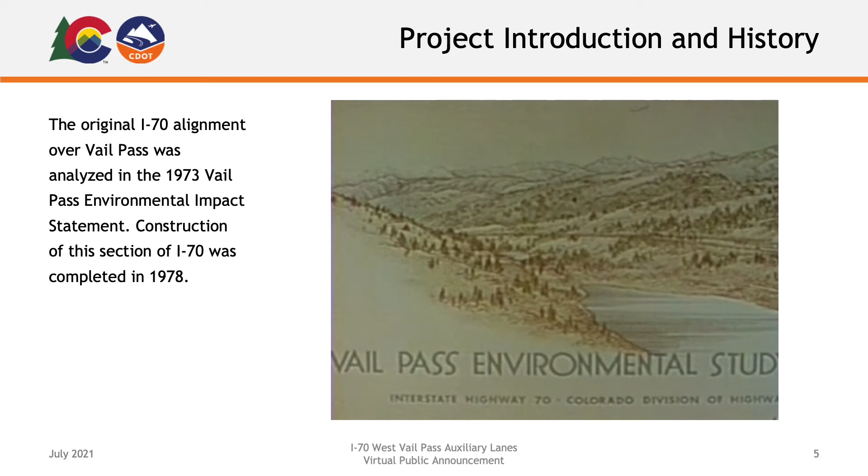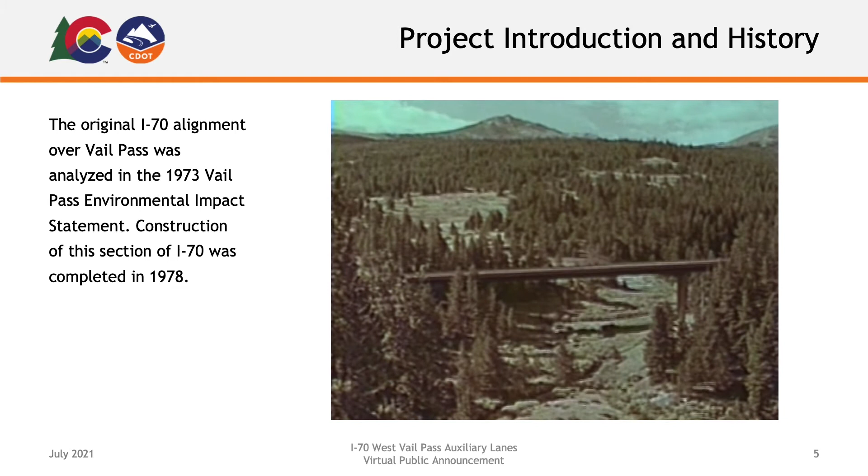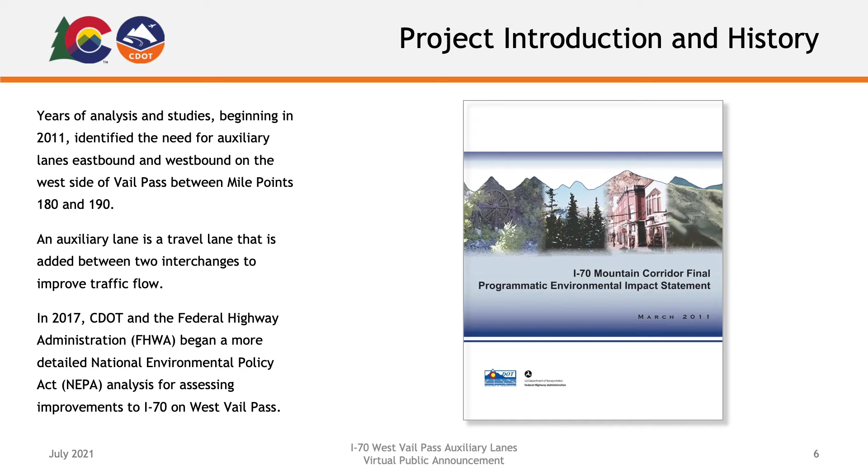The original I-70 alignment over Vail Pass was analyzed in the 1973 Vail Pass Environmental Impact Statement. Construction of this section of I-70 was completed in 1978. Years of analysis and studies, beginning in 2011, identified the need for auxiliary lanes eastbound and westbound on the west side of Vail Pass, between milepoints 180 and 190. An auxiliary lane is a travel lane that is added between two interchanges to improve traffic flow.

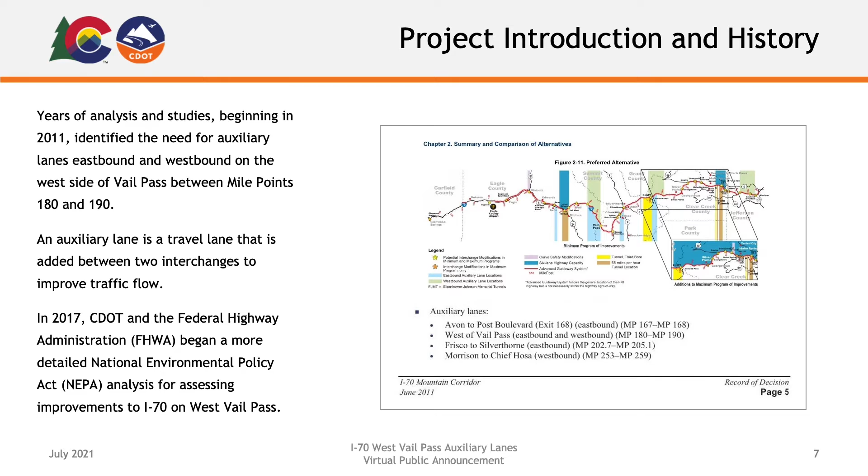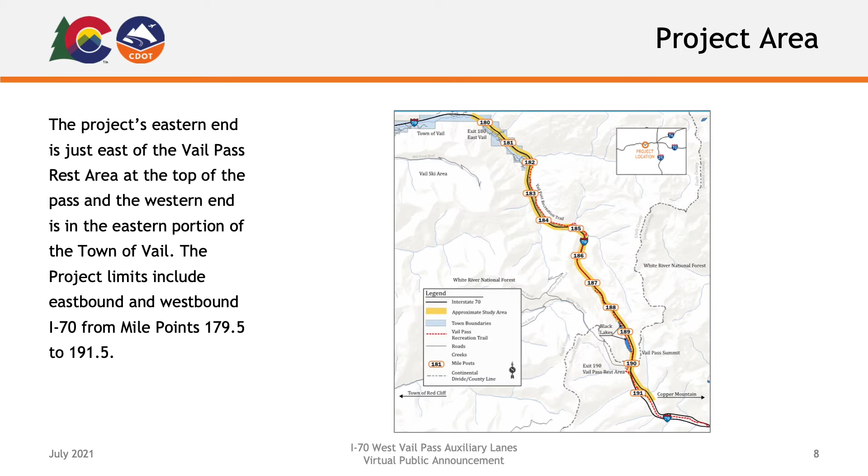In 2017, CDOT and the Federal Highway Administration, FHWA, began a more detailed National Environmental Policy Act, NEPA, analysis for assessing improvements to I-70 on West Vail Pass. The project's eastern end is just east of the Vail Pass rest area at the top of the pass, and the western end is in the eastern portion of the town of Vail. The project limits include eastbound and westbound I-70 from milepoints 179.5 to 191.5.

The project context statement and core values helped us to frame the unique conditions of the project, as well as the concerns and values to be considered during the environmental assessment, EA, and future decision-making. This context statement was based on the original Mountain Corridor context statement and was further developed for this project through a robust process with project group members, resource agencies, and community members. The context statement captures in words the special qualities and attributes that uniquely define Vail Pass.

The project purpose and need statement was developed based on the I-70 final PEIS purpose and need, which identified safety and mobility issues on West Vail Pass related to speed differences between different types of vehicles, such as cars and freight operators or other slower moving vehicles. The purpose of the project is to improve safety and operations on eastbound and westbound I-70 at West Vail Pass. Operations, as defined here, means how well traffic flows through an area, which can be affected by the number of cars and trucks, weather, curves, steepness of the road, and other features.

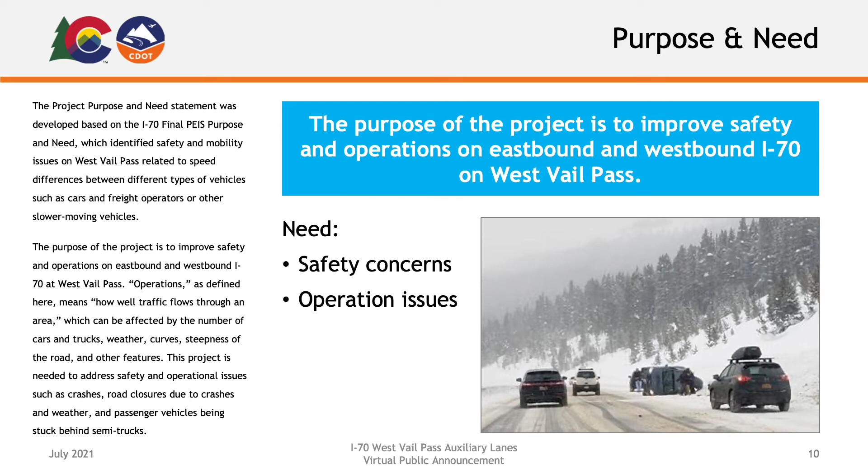This project is needed to address safety and operational issues such as crashes, road closures due to crashes and weather, and passenger vehicles being stuck behind semi-trucks. In June 2020, CDOT was awarded a federal Infrastructure for Rebuilding America, INFRA, grant. This, combined with other funding sources, will allow for construction of the first phase of the project, totaling $140.4 million.

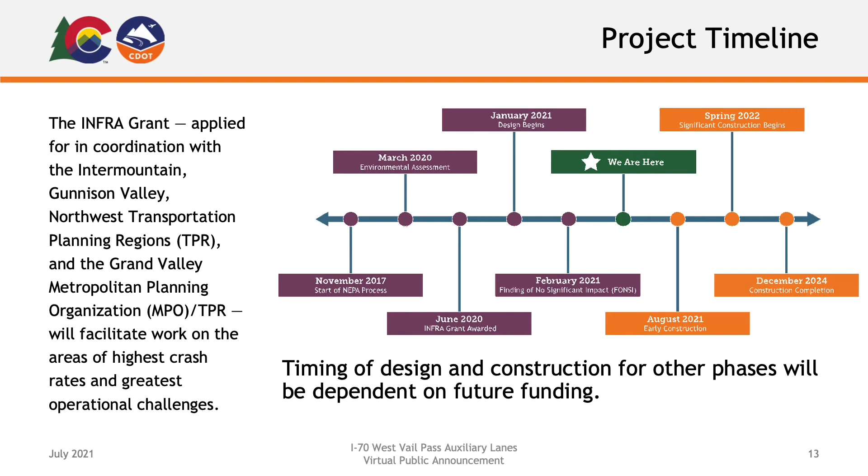The INFRA grant, applied for in coordination with the Intermountain, Gunnison Valley, Northwest Transportation Planning Regions, and the Grand Valley Metropolitan Planning Organization, will facilitate work on the areas of highest crash rates and greatest operational challenges. Design of the INFRA grant improvements that have identified funding started in early 2021 on the West Vail Pass Auxiliary Lanes project.

These Phase 1 improvements include an eastbound I-70 auxiliary lane with widened shoulders between milepoints 185 and 190, westbound curve modifications with widened shoulders at milepoints 186 and 188, bridge replacement at eastbound milepoint 185.3, truck ramp reconstruction at milepoint 182, highway closure system, 6 wildlife underpasses and fencing, 2 miles of Vail Pass recreational trail relocation between milepoints 185 and 187, improved signage and incorporation of an active traffic management system and variable speed limit signs across the entire project area.

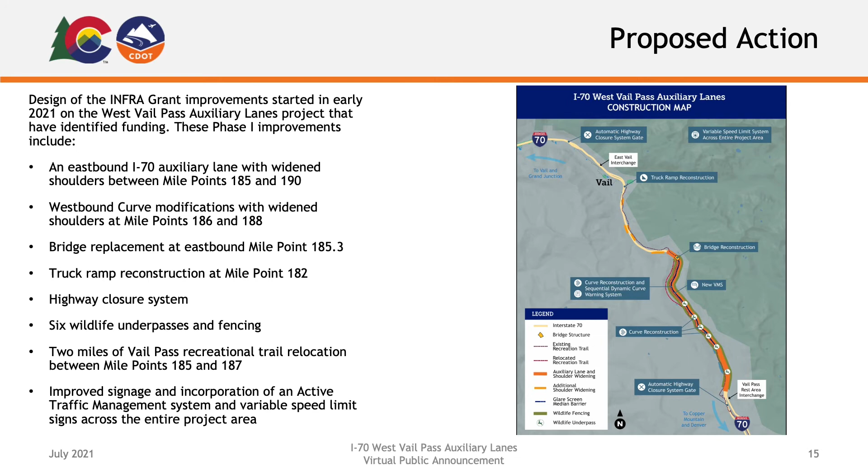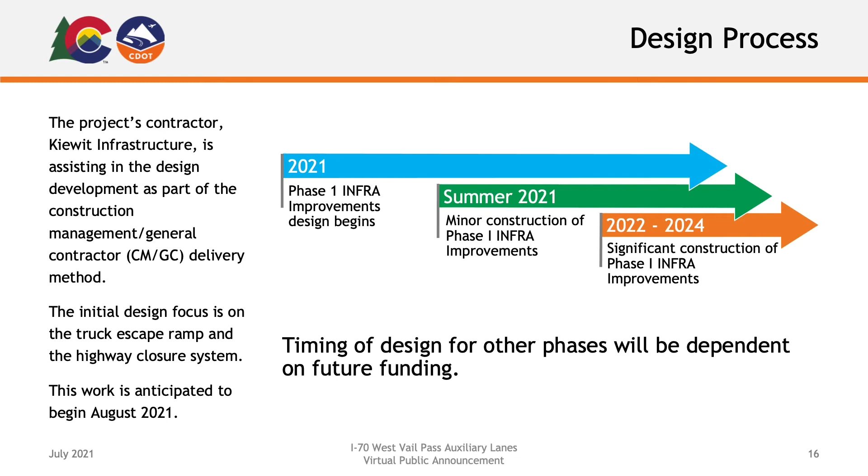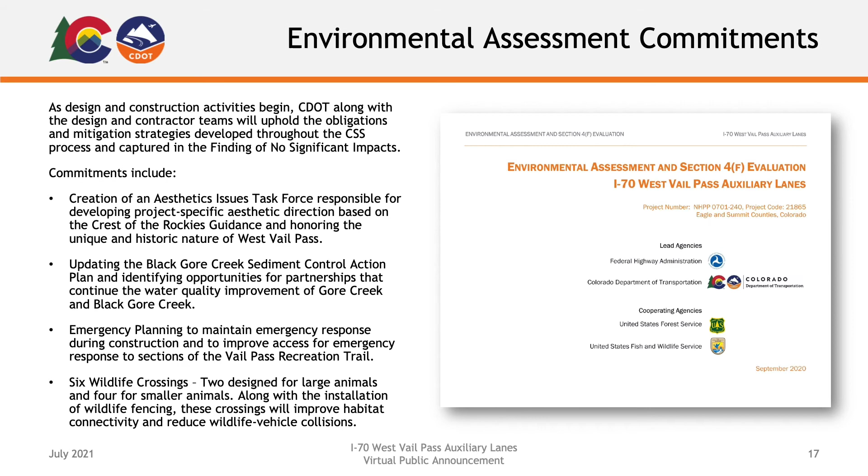The project's contractor, Kiewit Infrastructure, is assisting in the design development as part of the Construction Management General Contractor, CMGC, delivery method. The initial design focus is on the truck escape ramp and the highway closure system. This work is anticipated to begin August 2021. As design and construction activities begin, CDOT, along with the design and contractor teams, will uphold the obligations and mitigation strategies developed throughout the CSS process and captured in the finding of no significant impacts.

Commitments include creation of an aesthetics issues task force responsible for developing project-specific aesthetic direction based on the Crest of the Rockies guidance and honoring the unique and historic nature of West Vail Pass, updating the Black Gore Creek Sediment Control Action Plan and identifying opportunities for partnerships that continue the water quality improvement of Gore Creek and Black Gore Creek,

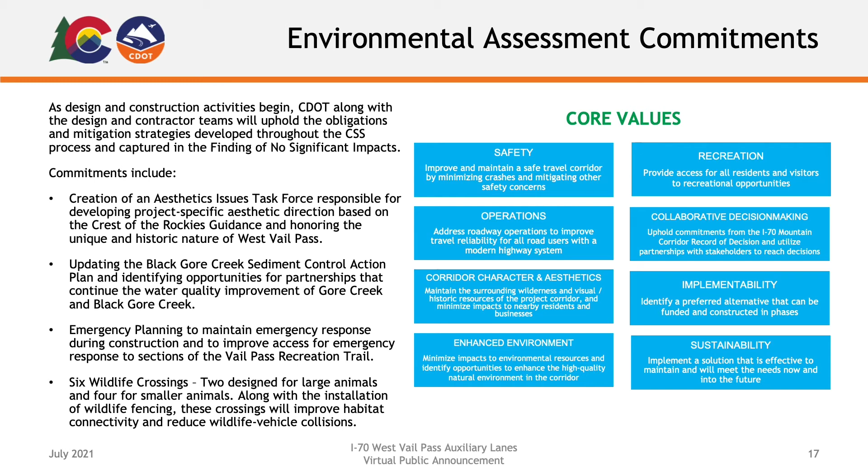emergency planning to maintain emergency response during construction and to improve access for emergency response to sections of the Vail Pass Recreation Trail, and 6 wildlife crossings, 2 designed for large animals and 4 for smaller animals. Along with the installation of wildlife fencing, these crossings will improve habitat connectivity and reduce wildlife vehicle collisions.

Minor construction activities that should have little effect on I-70 traffic are scheduled to begin in August 2021. These initial construction activities will focus on reconstructing the truck ramp near milepoint 182 just east of Vail and installing a highway closure system near milepoint 190 at the top of Vail Pass. The truck ramp will be closed during construction this summer and fall and is expected to reopen by the end of 2021. The recreation trail will remain open. Construction flaggers will direct trail users to help maintain a safe buffer from construction.

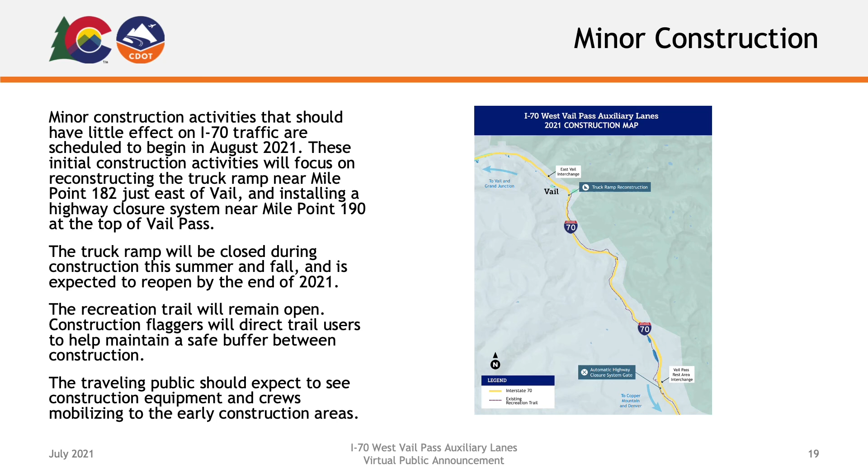The traveling public should expect to see construction equipment and crews mobilizing to the early construction areas. More significant construction activities will start in spring 2022, spanning 10 miles of I-70 from East Vail to the top of Vail Pass.